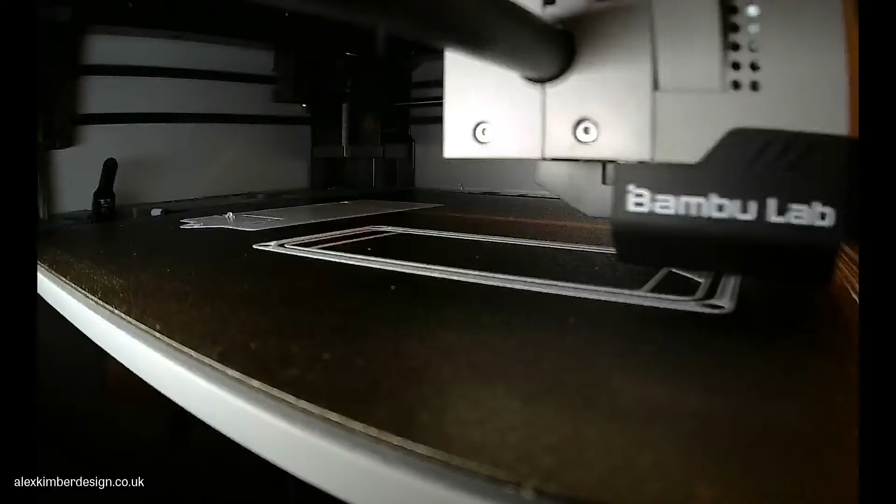So today's stream, there's a couple of exciting things. Firstly, let's take a look at what I'm printing today. So this is the printer working on a...

Oh, it doesn't look good. I don't like that filament peeling up at the back there. I need to take a look at that.

Okay, so this is why we have a camera viewing the print, so I can see when there's errors about to happen, and I can catch it in real time. And that way, we prevent disasters from happening.

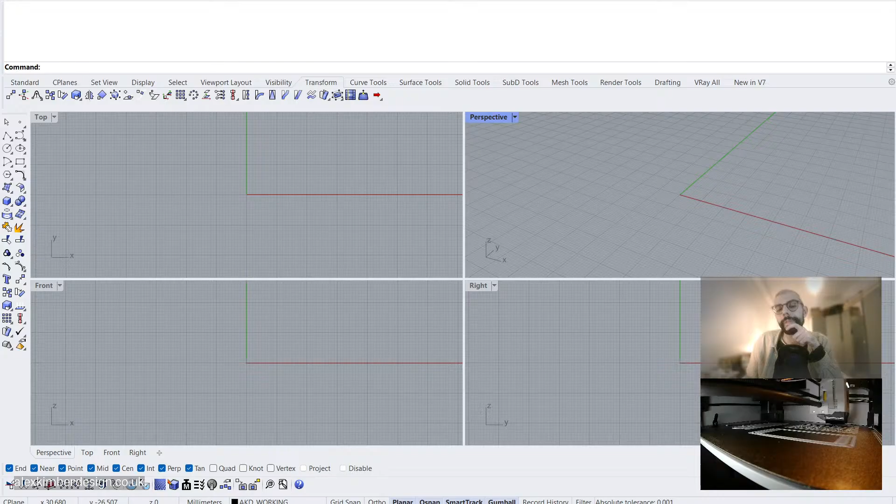So, firstly, I need to upload an image because I took a picture of this galleon chair leg, and I'm going to use that picture as the kind of template to draw from in the program. You'll see where I'm coming from in a moment.

I import a picture, go to my downloads, you'll see this. Now, that picture quality is not great, but it's just enough to see the dimensions. So that's fine.

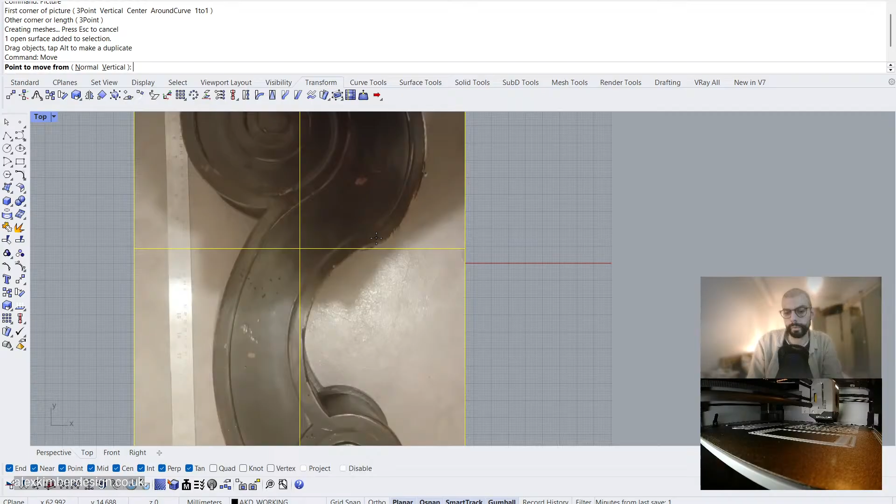Let's move that to the origin. Move... oh. Okay. I'll move it to the center of the world. I can't actually see the origin.

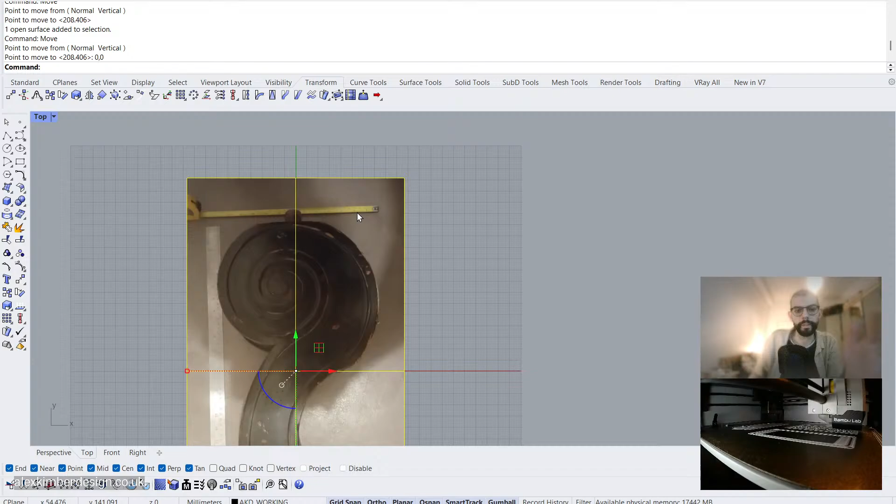Now I've got my tape measure here. I've got a chair leg that I'm measuring up. You're gonna see me doing some quick dimension checks. That's about 61 centimeters.

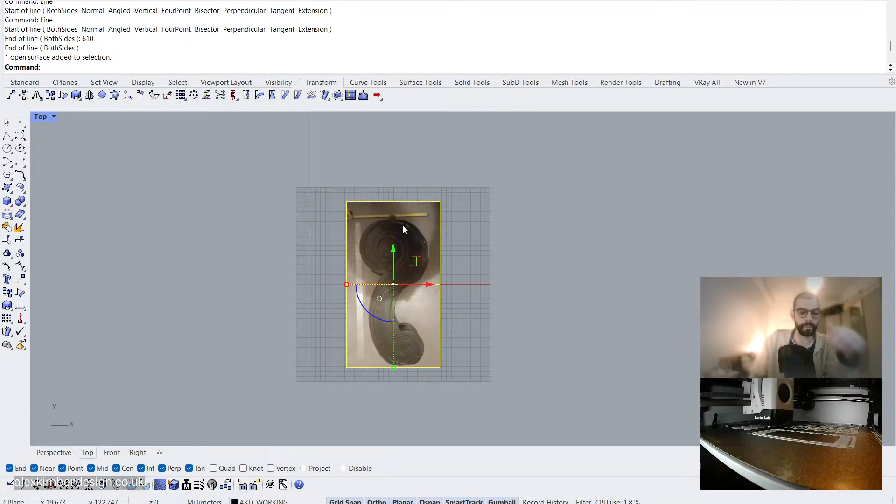610 millimeters. So we need to scale that from a grid snap off there to there, such that it is 610. That's roughly right. Let me make this a bit more accurate.

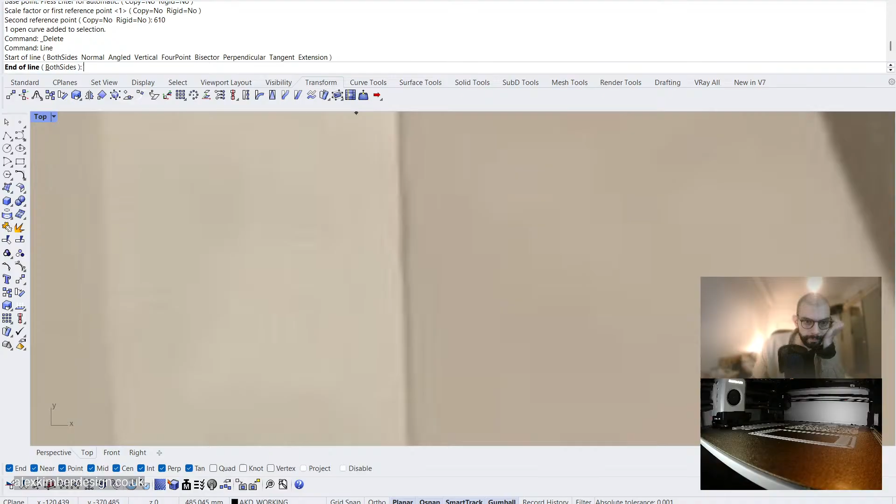From the end of the ruler in the image to... yeah, I got a really blurry image here, didn't I? That says 38, right? 38, 15 inches. That adds up.

Now let's check the distance, end of that line. 328. A little bit too small, the image.

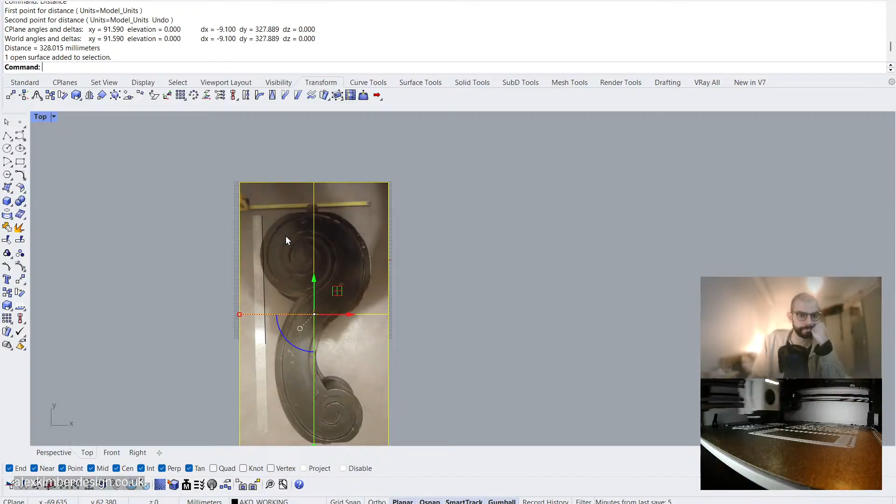Scale from there to there. 380.

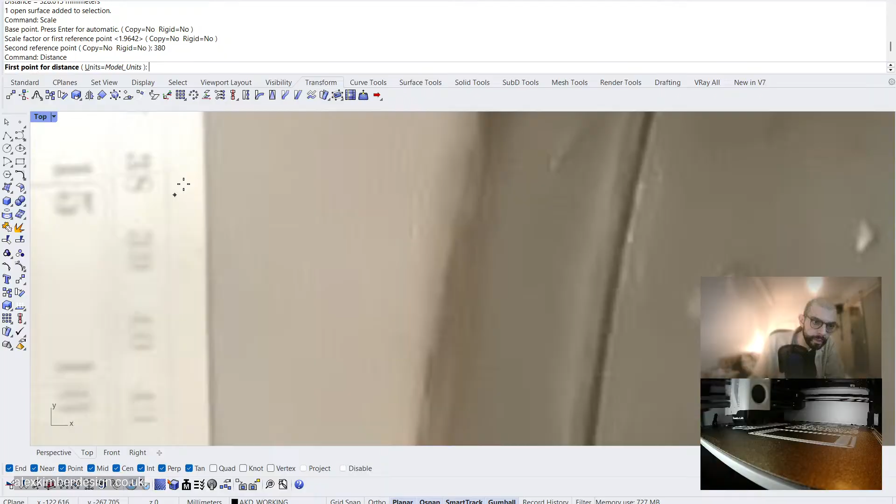Did that do what I wanted to happen? So from the 380 mark, measure the distance from there to the end of the ruler. 379.956. I think that's accurate enough.

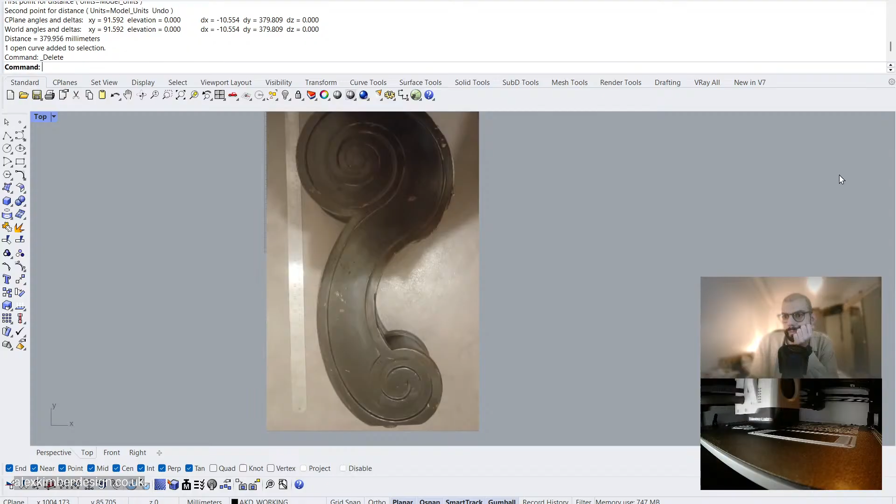So I need to see my layers. Why did my sidebar go?

Where's my... I'm currently missing my tools on the right hand side. There's meant to be a window here that shows me my layers and properties. This is a little bit boring, but I need to see what I'm doing.

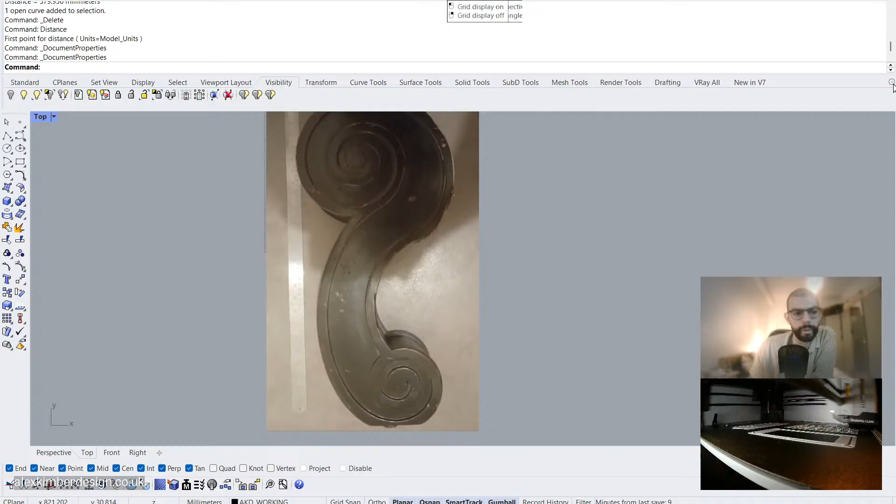Where? Oh no, this is silly. Aha! Ta-da! Right, brilliant, brilliant, brilliant.

So this picture, I'm going to change layer and send it to reference because it's a reference image. I don't want to accidentally move it around like that. So I'm going to lock that layer and now I can't accidentally damage it.

Brilliant. Let's check up on the printer. No errors there, that's looking good. We can get back to working.

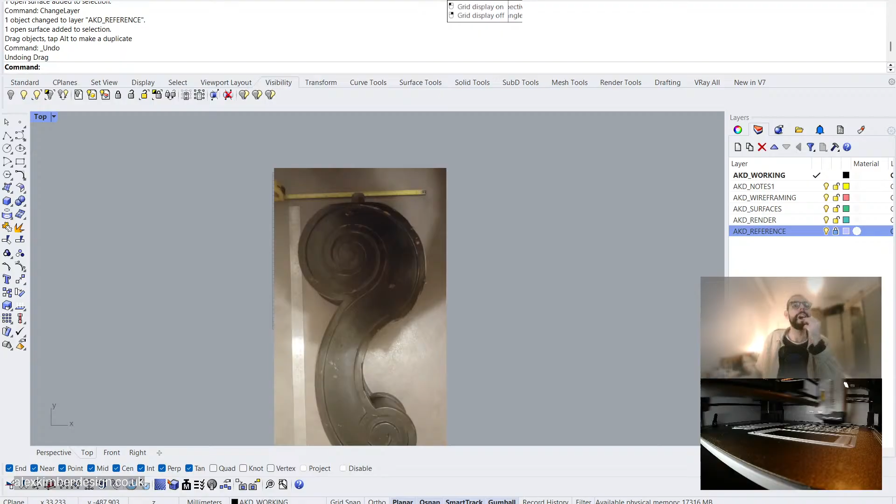Now, this was a terrible image, but it's what we have to work with.

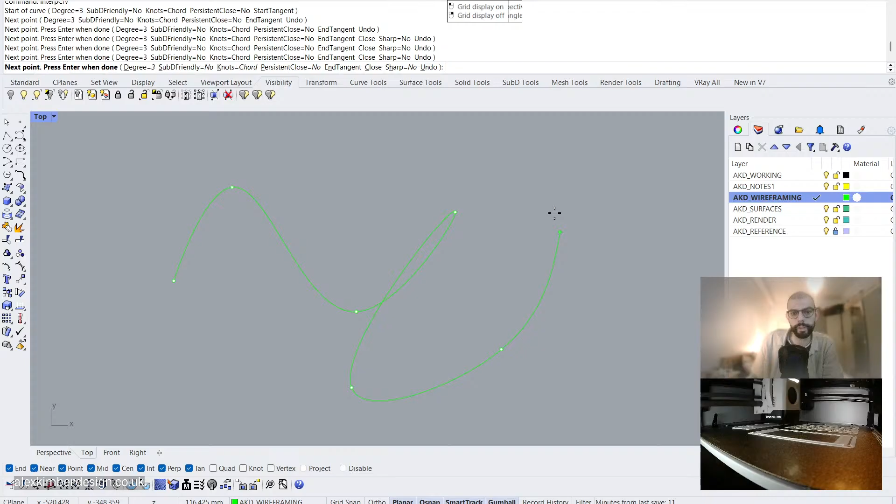I'm going to use, in the wireframing layer that I've got here, an interpolate curve. Interpolate curve means wherever I click - I don't know how easy that is to see, let me change the color, let's make it green - that's a bit clearer. Wherever I click, it puts a point, and the curve has to pass through every single point. I can keep going and so on.

So I'm going to use that tool to trace this out, see how that goes. Start there. This could almost be quite meditative.

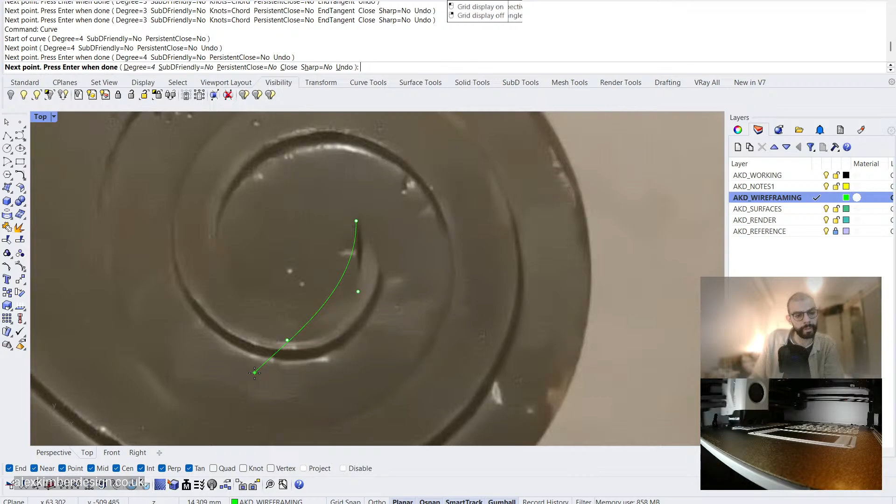Okay, maybe I'm going to do a different approach. No, where's the... yeah, interpolate curves. We can always edit the curve later.

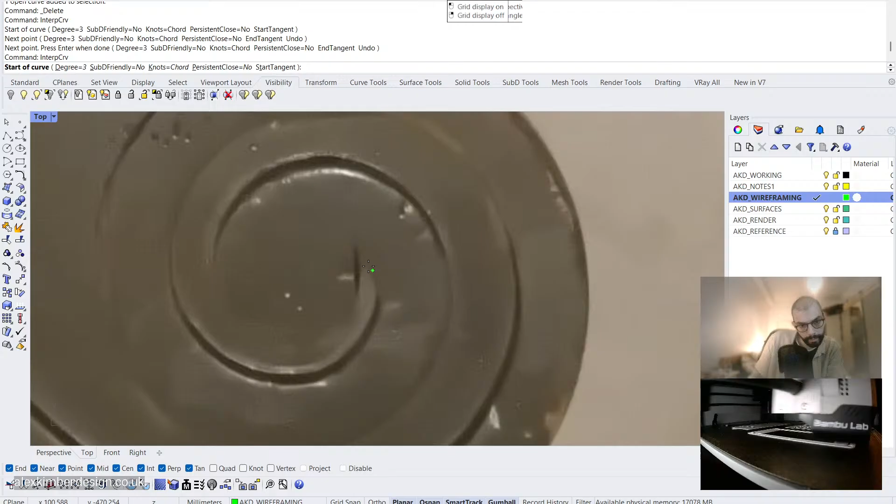I can't see in this photo how tight that bend is. I think it's tighter than I thought it was. There we go, that looks like it's a bit better.

So I want to try and aim for the top edge here and cut down into it. I can see how I could go for either this bottom edge or this top edge, because it has depth. I'm going to use the reflection, where there's a kind of radiused edge, as a guide to see where that top is.

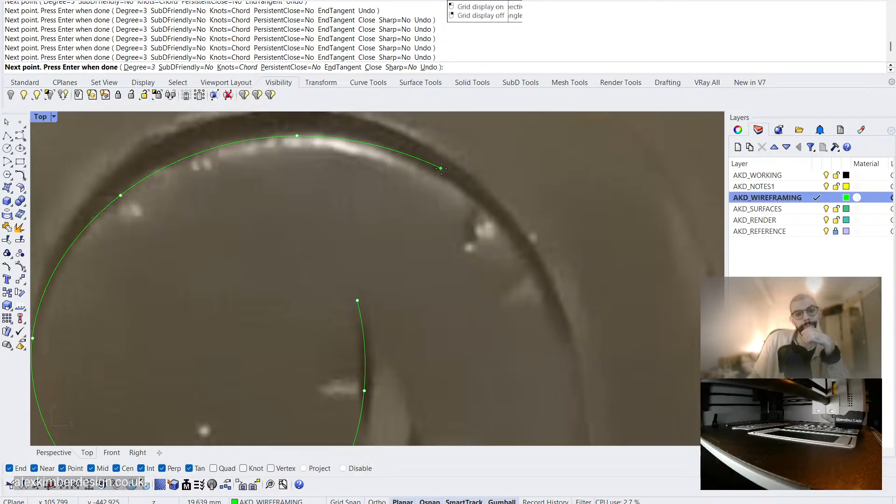And we're going to go round and round and round. Now this bit is pretty boring, so this might be an opportunity for me to talk about why it is I'm doing what I'm doing.

Right, I'm going to terminate that curve there and do a new one starting from there. So I'm thinking with this project, I don't know whether it's going to be a chair or a side table or a lamp. Feel free to leave comments and make requests for what you'd like to see.

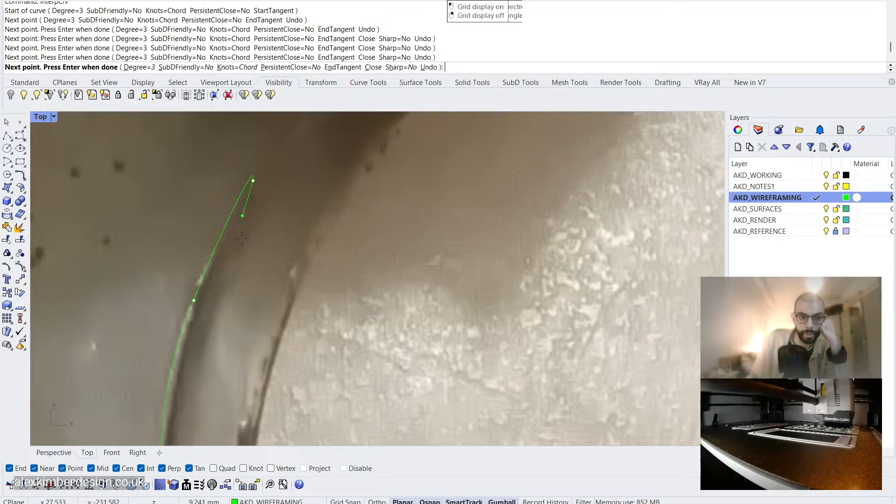But my gut feeling is that it's going to be a little stool. Very robust bit of wood. Don't see why it couldn't be a stool.

Just taking a look at the model to see what point I'm at. Round, yes, that's a hard corner. So we're gonna finish that there and do a new curve.

So let's say it's a stool. I'm thinking what would be interesting is to 3D print a seat, or 3D print the seat to attach on top.

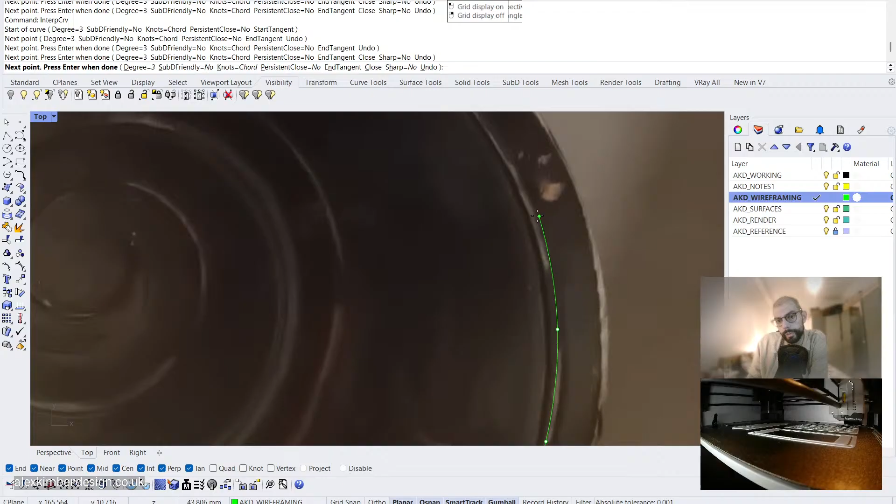And instead of doing it in a style that's in keeping with the very old-fashioned looking table leg, I think I might do some crazy sculptural, mad looking thing, just to contrast the old and the new.

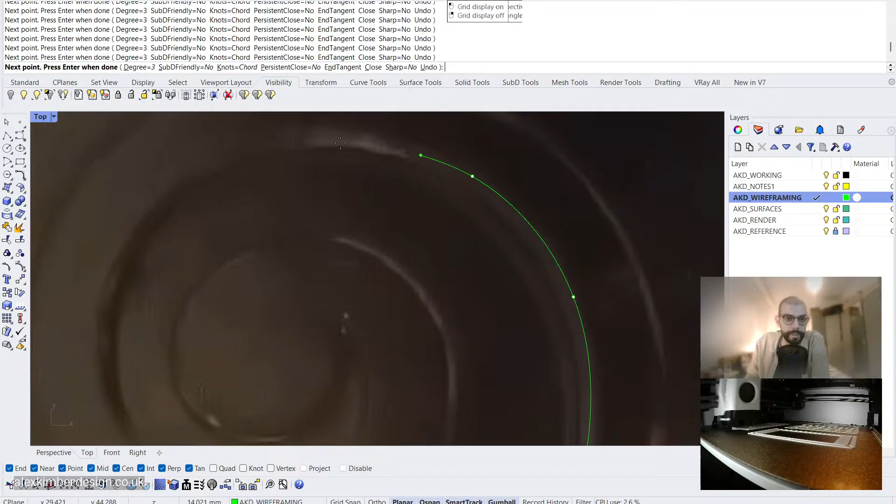Combining to make something not quite as good as either. I'll tell you what, this is quite relaxing, just clicking around in spirals.

Now I can already see this curve is a bit wonky, so I might need to adjust it later if I want to get a really accurate one. But actually, I don't need a really accurate model here.

I just need to get it in CAD so that when I design the features that are going to interact with it, like the seat or the foot or whatever, I can actually work with it on the computer. So all the decorative elements on this don't need to be perfect. Important to remind myself: done is better than perfect.

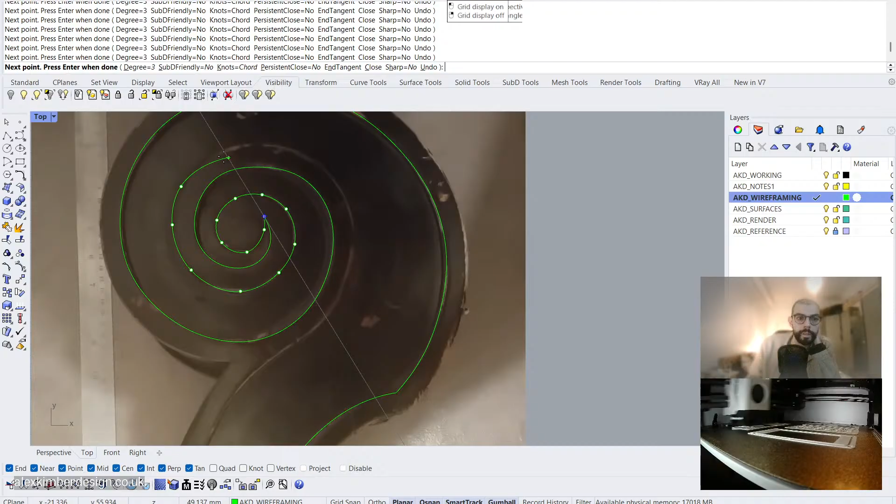No. What was it? Take off object snap. That's what OSNAP stands for, object snap.

Now this has got quite an annoying issue. Can you see how the curve is coming in kind of at one angle of attack and then flexes out in the other? That's going to cause me problems. So what I'm going to do is just use a lot more control points here, which might give me a sort of raggedy, vibrating edge. I can fix that later by trimming it back and blending it, but for now that's going to get me around this curve that changes direction problem.

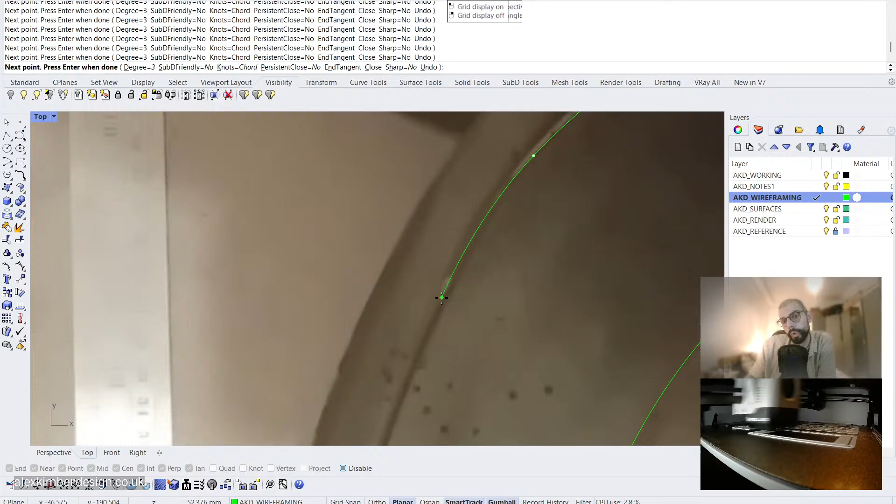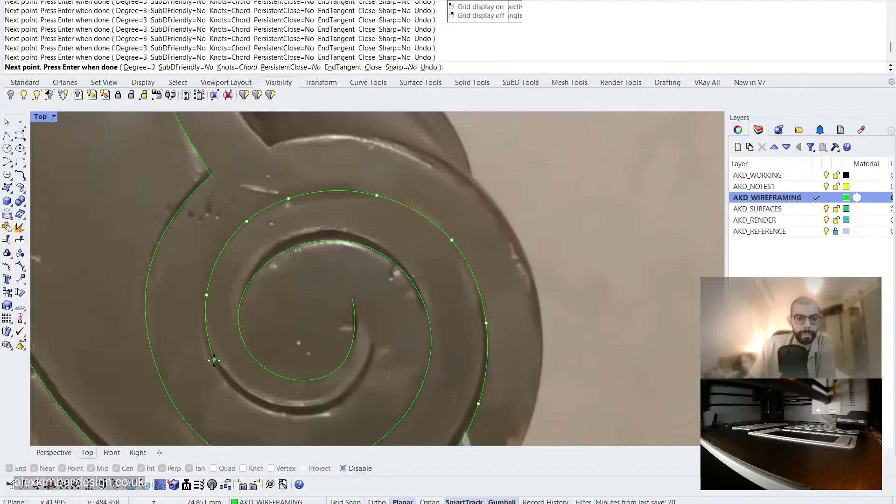Yeah, when I saw this being thrown out the other day, I thought, oh, I'll have to take that. I felt very justified when I came home because I was carrying this on the train, taking up a lot of space, and as I was walking home from the station, someone said, 'What are you carrying?' We got into a conversation and they said, 'Oh, that looks amazing. It could be a lamp or even just a work of art on its own.' So a stranger complimented me on my piece of trash.

Okay, I'm going to turn object snap back on to locate that little corner. Ding, lovely. So we've now captured the inside area, as it were, I think so. Now let's do the outside.

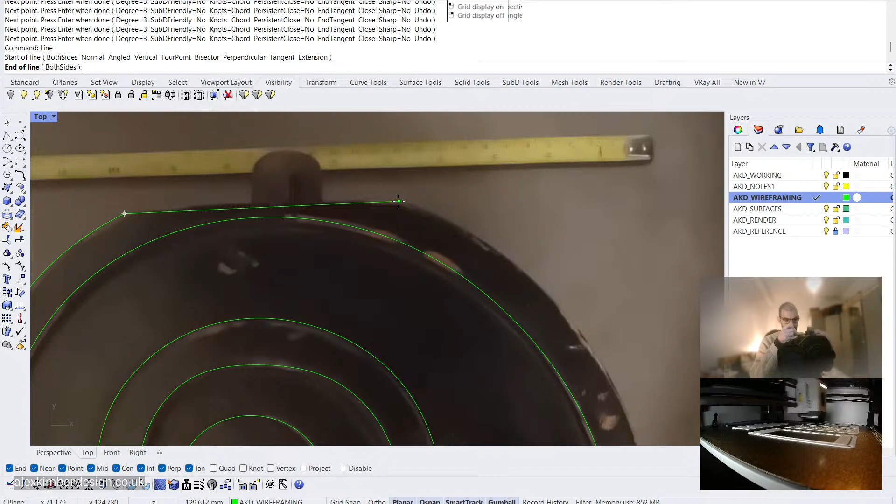That's obviously going to be a straight line. Now I think this part at the top does need to be quite accurate. Let's measure exactly how long that flat surface is. Oh god, this thing's heavy. At 98... 98. Oh, that looks shorter than how the picture presents it.

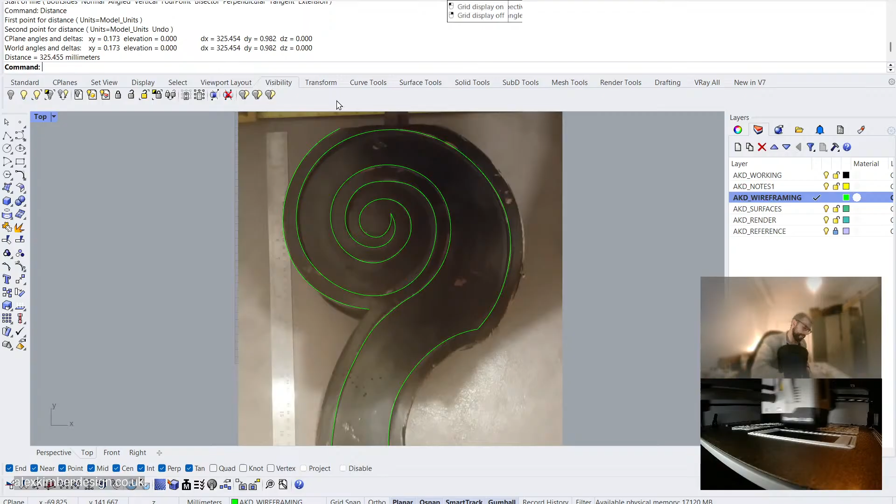Bit of an issue. Okay, let's do distance from that far edge to that edge, just kind of measure what the breadth is. So according to this, it's 325 millimeters breadth. Only 32.5 centimeters. My scale is off, I thought I'd scaled that.

Must be something to do with the perspective in the photo or something, but the scale's a bit off. So we're going to unlock that, select everything, and let's do this another way. If I measure what it is in the real world... getting a width of 226 millimeters and a height of 531 millimeters. Write that down.

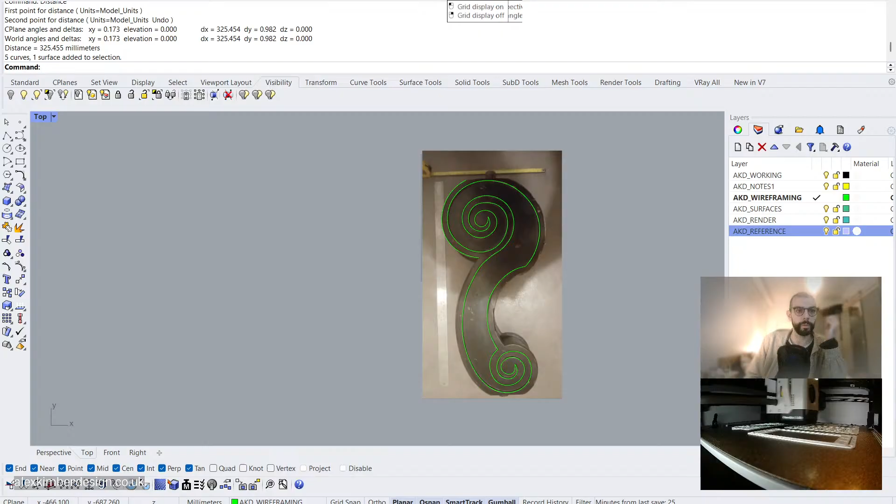Now, for those of you who are my diligent and consistent fans, you might be asking where the funnel from last week has gone. What happened to the funnel I was modeling last week? I didn't get around to finishing it, is what happened to it. Then between then and now, I found a table leg and decided to start modeling that instead. But I will finish up that funnel because it would be really useful for preventing water damage in Grandad's conservatory. I just found an exciting looking table leg first, so I thought I'd make a start on this and then finish the funnel.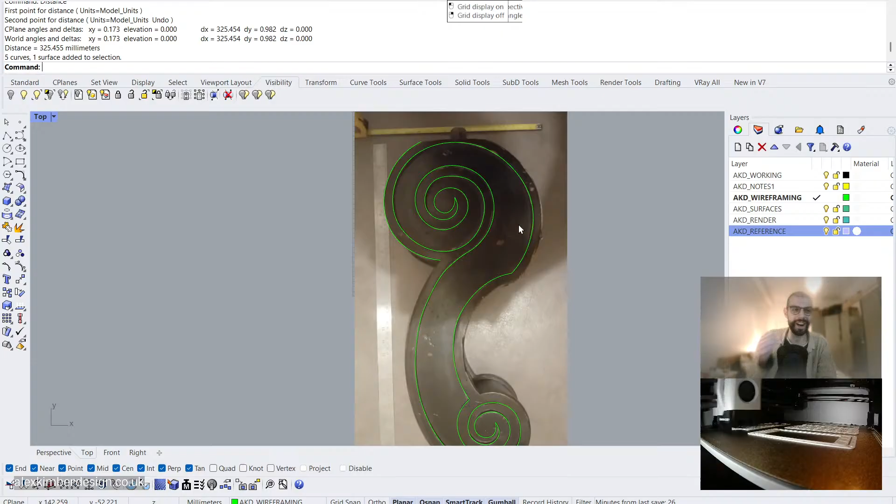So what I'm going to do is progress this a little bit by making a rectangle 260 by 531. That's the size it should be. So we're a bit off.

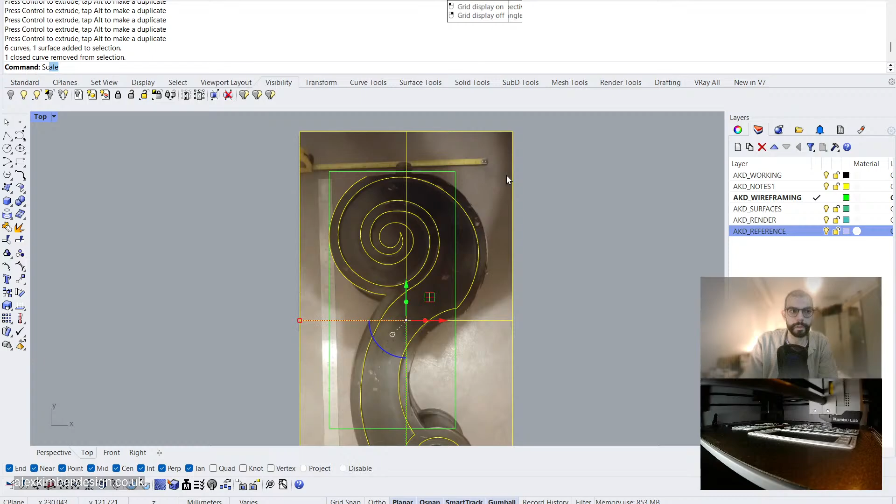Now let's select everything apart from that box, scaled from there to about there, and bring it back to...

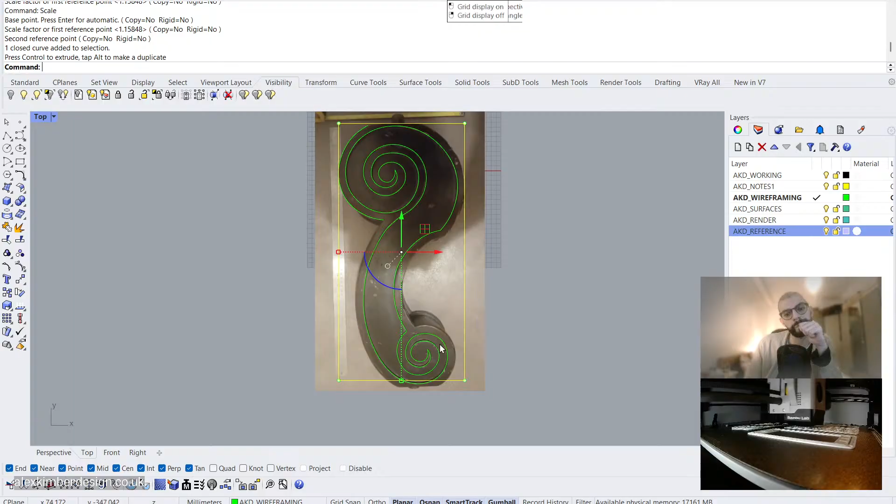If I still have my Photoshop subscription, I might be able to flatten this image in a way that makes a bit more sense.

You're wondering what I'm eating on this stream? I've got some dark chocolate and I've got some chamomile tea.

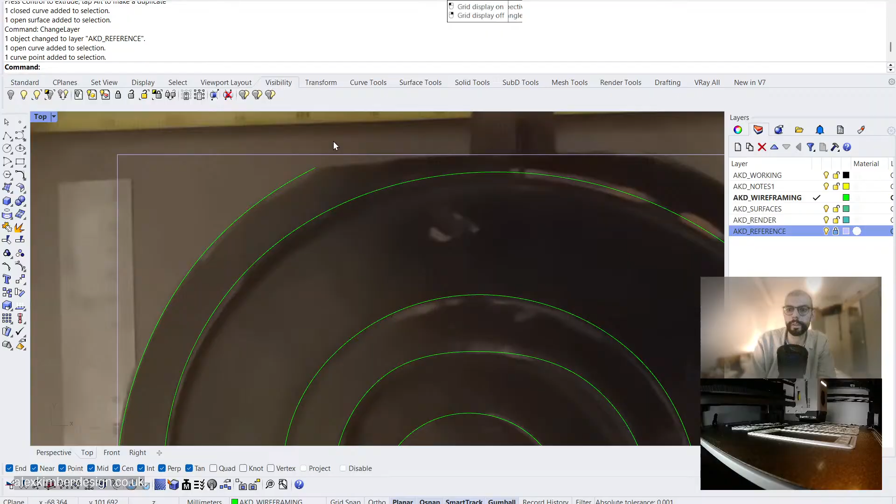Okay, I'm going to select that and that, send it to the reference layer. I'm going to close that, lock that. I'm going to finish this and then scale it later.

So what did I measure that as? 98. All right, that looks more like it. Back to the interpolate curve.

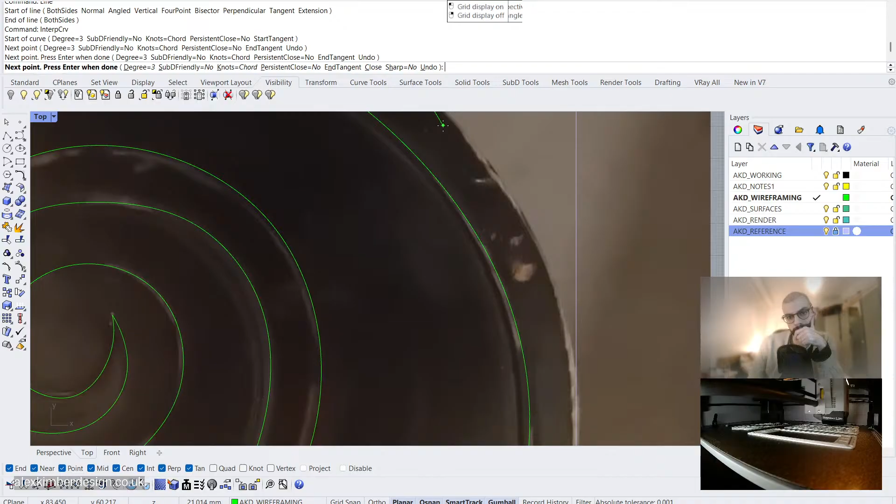Now, once this is modeled up in here, this might even become part of a sort of mini series as we develop this bespoke product.

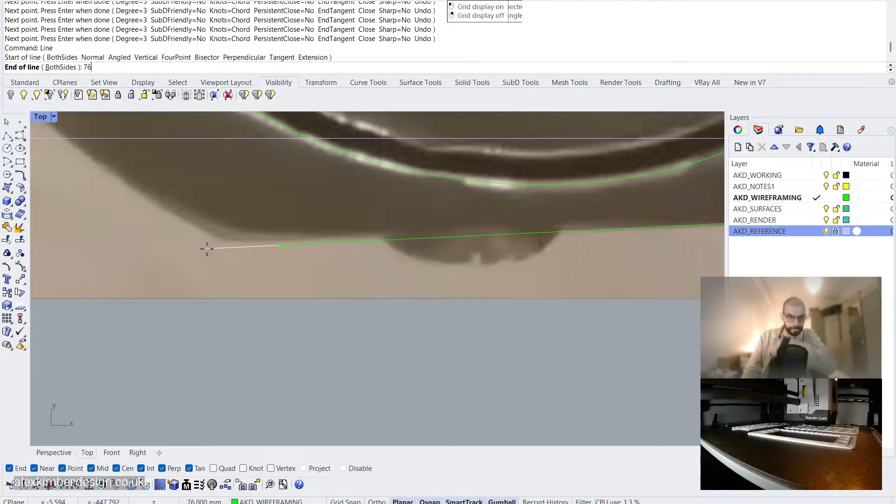Now let's see what the distance on that bottom flat is. I make it 76. So we do a straight line starting from that point in that direction, 76. Okay, a little bit shorter than expected, but it's fine for now. Interpolate curve, up from there.

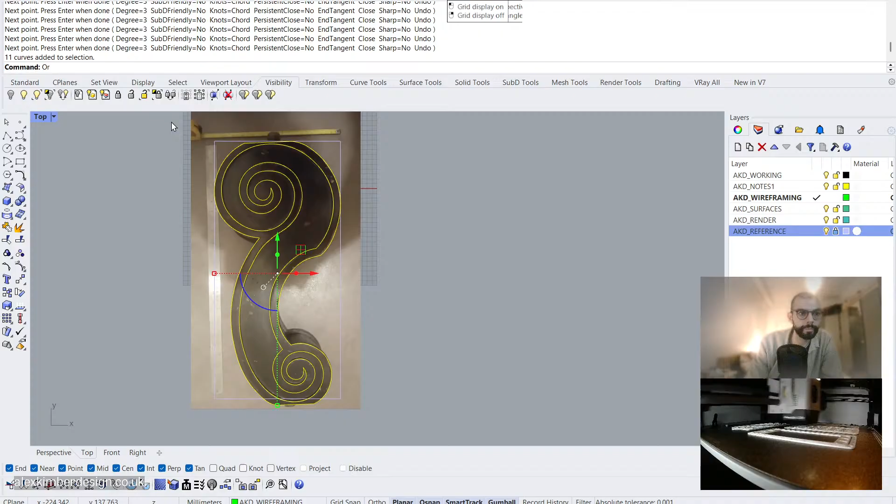Excellent, so we've now got a bit of a profile. Let's rotate that. I want it level. Orient line from there is level.

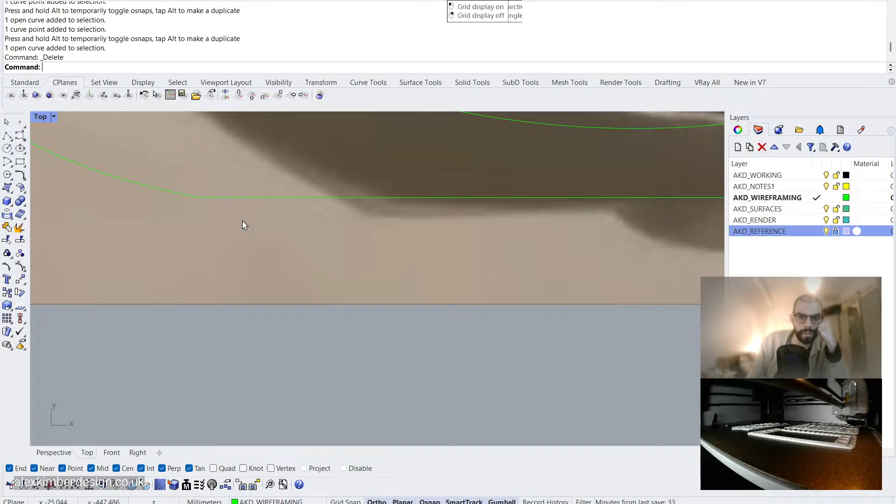Oh, look how close that was. I'm going to move this control point down, that control point, delete it. Delete that guideline. Now we have two flats that are level. Let's just check how long that is. 76, that's perfect.

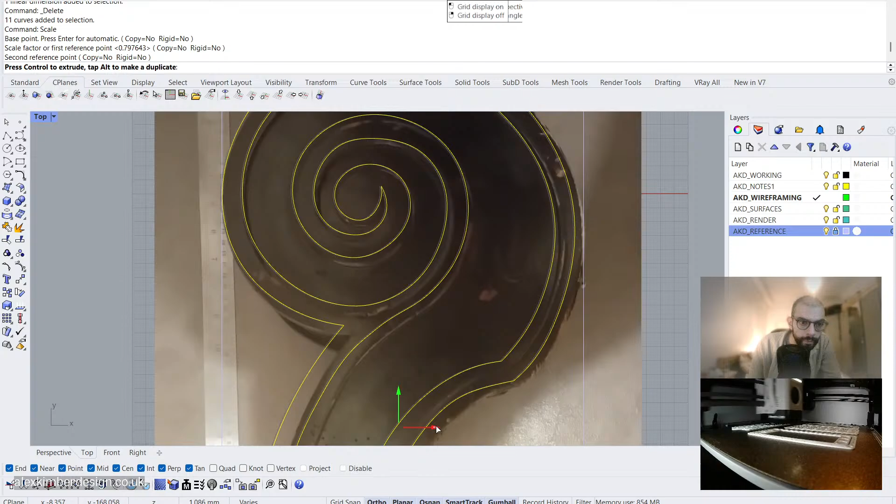Now let's take that whole thing and scale it so that it fits within our box. I think for developing this as a stool, it's more important that I have the height accurate than the width at this kind of decorative level. So that's fine. What I'm going to do now is start joining these curves together. Join. We can actually hide that reference layer.

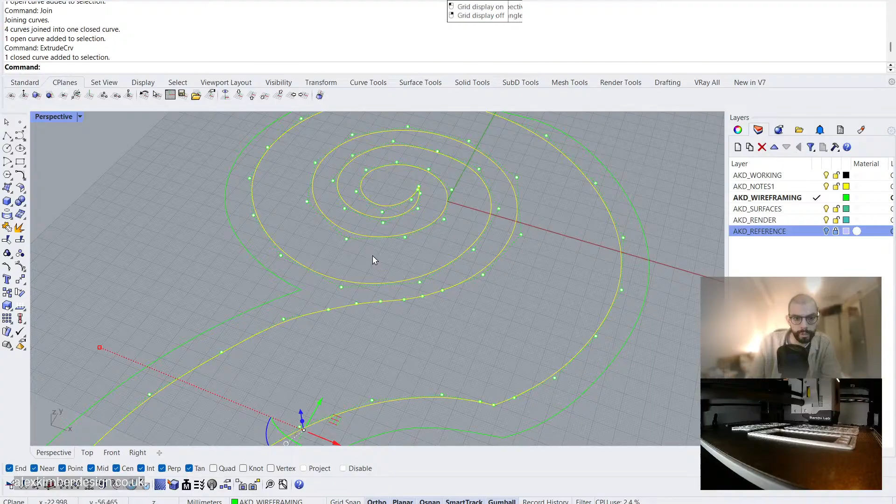I wonder if I just select both of those and extrude. Self-intersecting. Where are these?

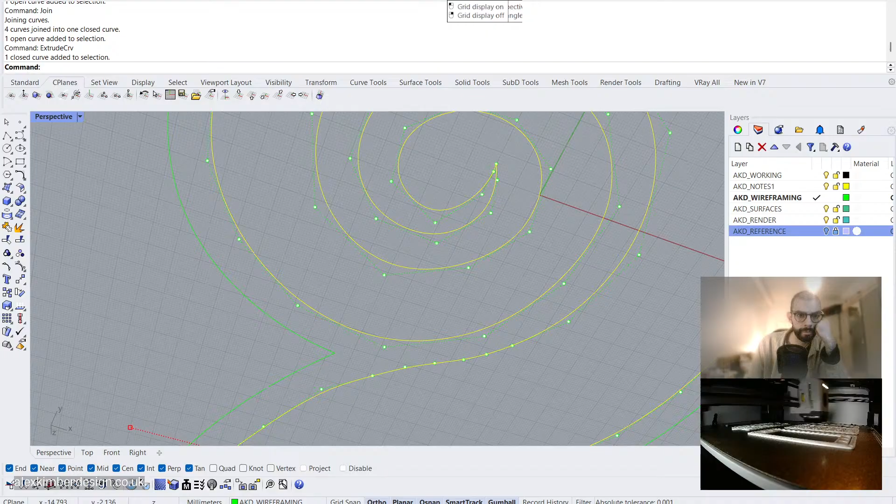Where do I have the self-intersecting curve? Find self-intersecting curve, Rhino. Oh, look at that - just had to do a quick Google to see if there was a relevant command. So that is a self-intersecting curve.

There's going to be a corner somewhere that it doesn't like. There we go. Trim that. Oh.

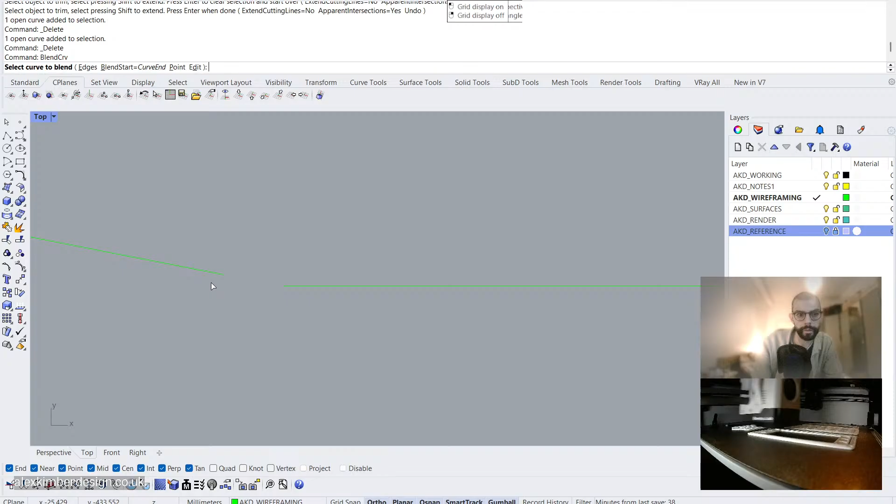Okay, here's what we're going to do. A line from there to there. Trim those. And then blend curve from there to there. Just a tangency curve. Join. Okie.

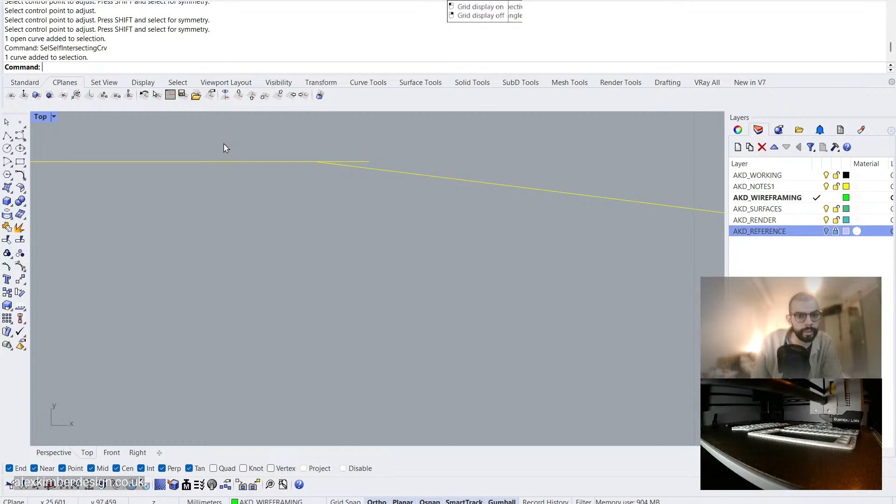Select self-intersecting curve. Still selecting this. Where else? Maybe that's our problem. Trim, edge. There we go, that must have done it. Select. Self-intersecting curve - nothing. Great, solved that problem.

So the computer's smart enough to pick up when there's geometric errors like that, but it's not quite smart enough to show them to you.

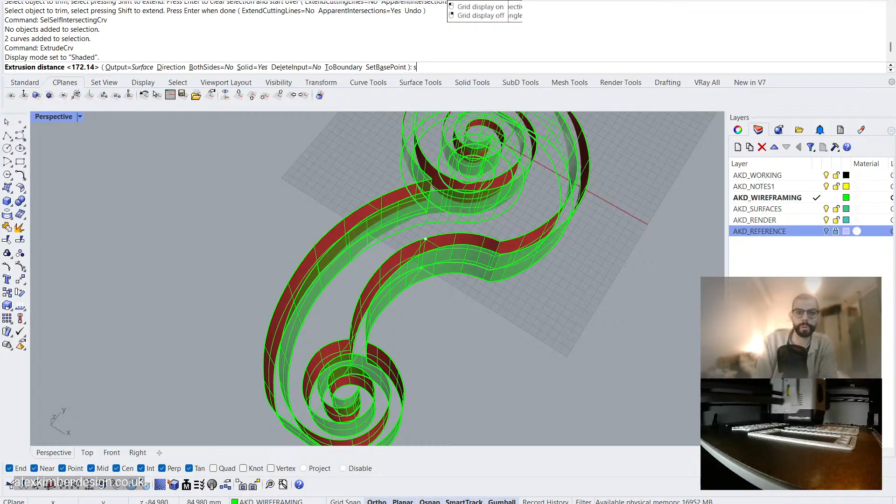Extrude curve. Brilliant. Now, if I put solid, is it going to cap it intelligently? No, not going to understand.

So the space that's being extruded - if we look at this model - is this kind of rim, but the rim pokes out, it's proud of the bulk material by about 4 mil. By about 4 mil.

Let's use 4.5... 4... 4.5. Let's say that's poking out by 4.5.

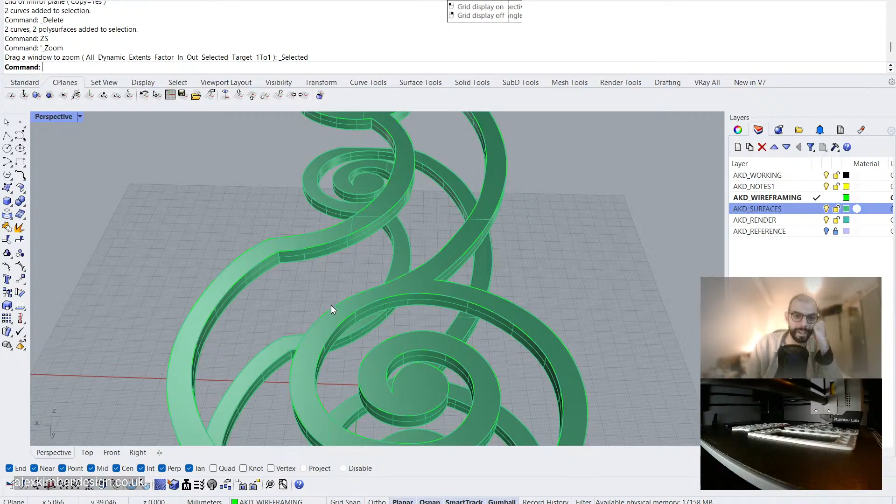So we're now back into this. Sorry if you missed all the fun, but this is where we're at now. We've got the two kind of outer rims, and I'm going to model the solid block in the middle now.

So let's look at this curve again, and let's lock off our surface layer so I don't get that mixed up. The solid block is about 5 mil, maybe 6 mil offset.

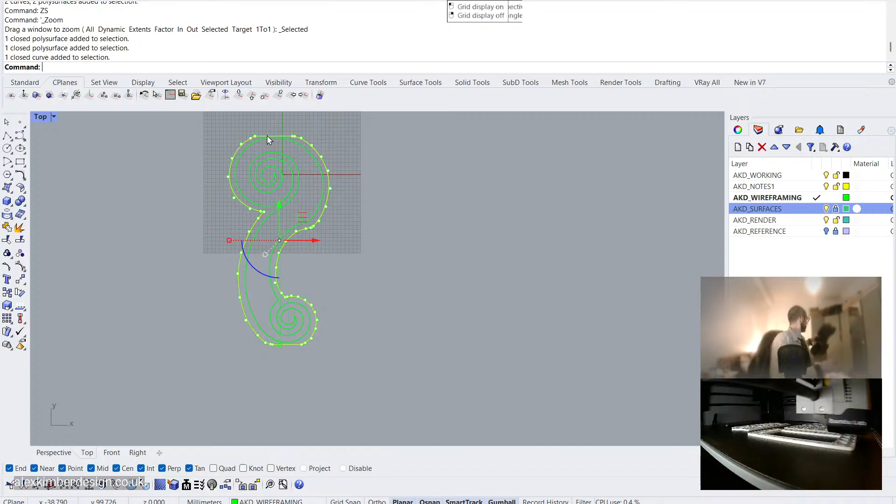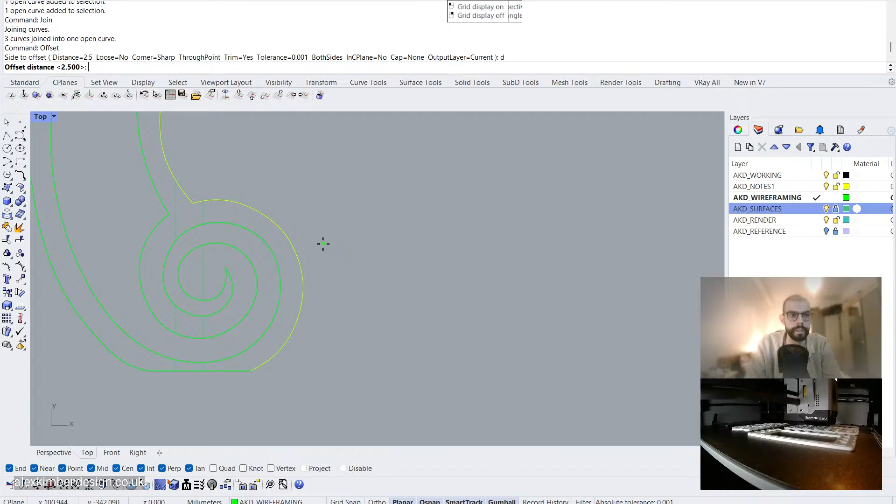I'm going to explode this curve, meaning separate it into its component parts. Join those together, so I have a kind of left and right side. Then I'm going to do an offset, changing the distance to 6 millimeters, and bring it offset inwards.

Does that work? Might need to do some adjustment. Same again, let's offset that inwards. Now with this, I'm going to need to extend the curve. Now extend it past the base because we've got a flat there. Do the same thing here.

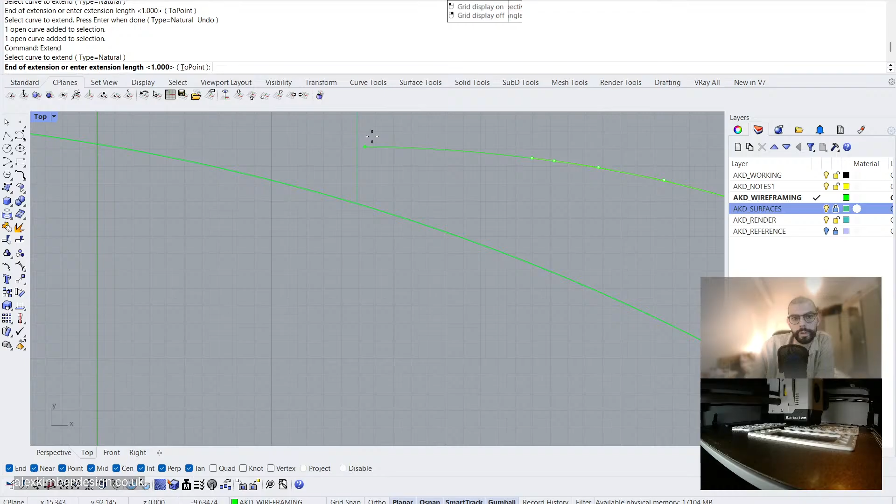Curve to extend this one. Now we've got problems there, that's not going to hit the base. So I'm going to trim that back to sort of there. This is being a bit rough and ready, but I think we'll survive. Extend that curve. Yeah, we're still not getting there, are we?

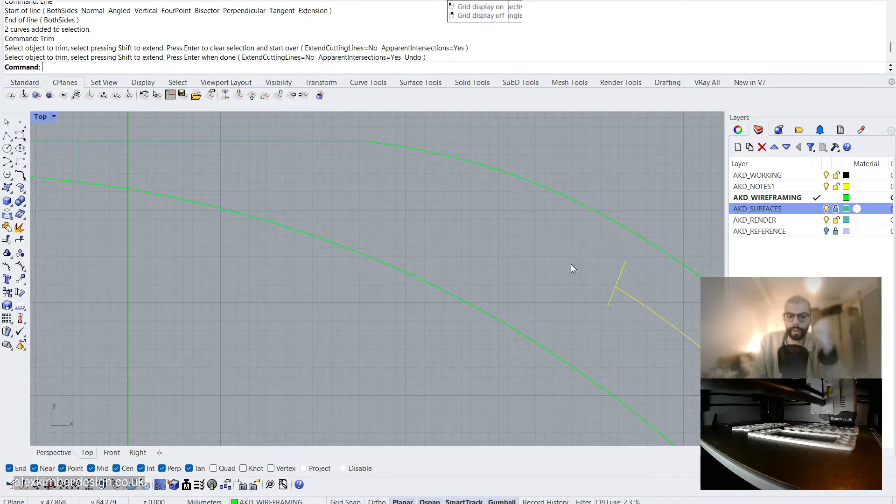Trim to there. Extend that curve. We're still not getting to the bottom. All right, let's do this a different way.

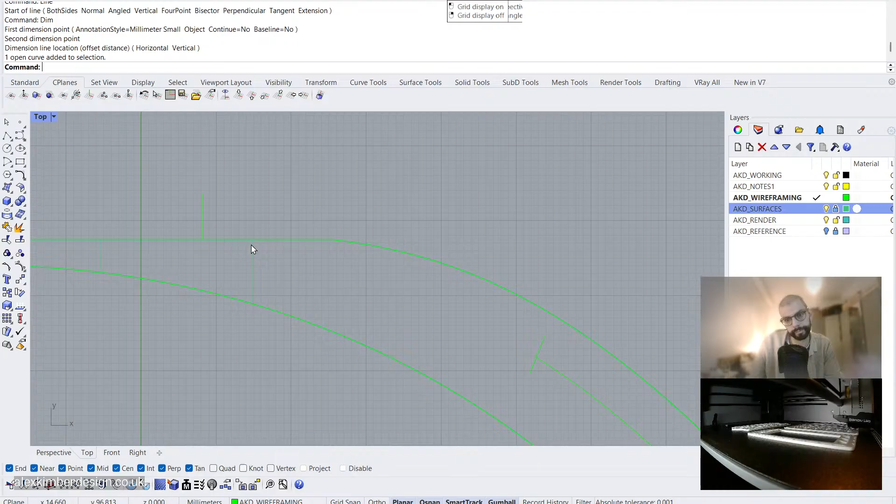Distance from there to there, 17.5. So from here we're going to move that minus 17.5. Now let's do a kind of straight line to there, then that further back. Delete that guideline.

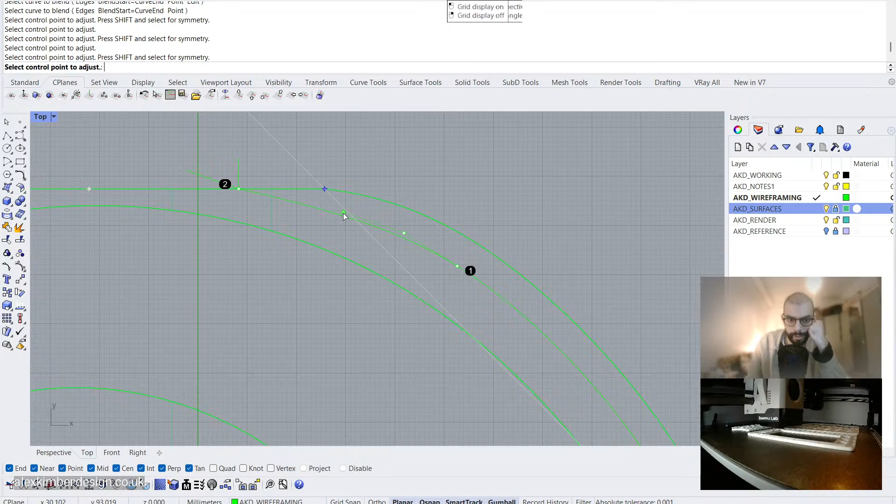Delete that, and then I'm going to do a blend curve from this to there. I'm going to do curvature, maybe that's more like it. That looks right. Brilliant.

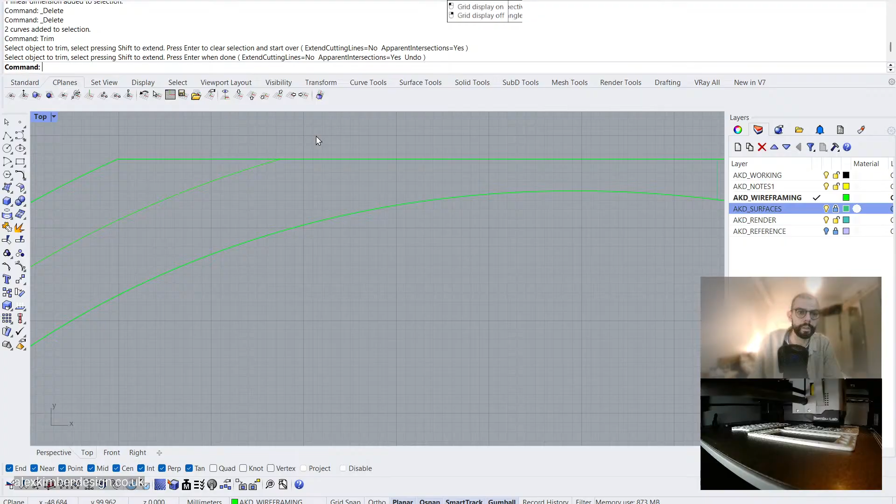Explode, that should release that. Then I can join that. Here I can get rid of that dimension. Trim that line back. Great. Now let's do the same down here.

Extend, are we going to cooperate? Ooh, yes, that's good. This is clearly not going to cooperate, you can see it's going to bend around. Yeah, that's never going to reach the bottom. So we do the same thing again, we've got a method now. Let's cut that back.

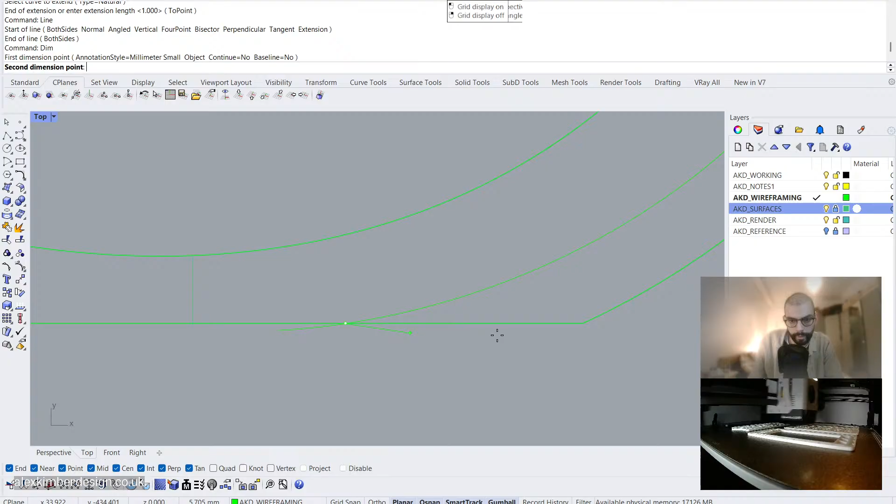Let's measure how far this is. That's 20.7. Let's do a line, move that 20.7. Let's do a bit of a straight line from there to there, and get our angle of attack right. Trim that back, delete that line. Blend curve from there to there.

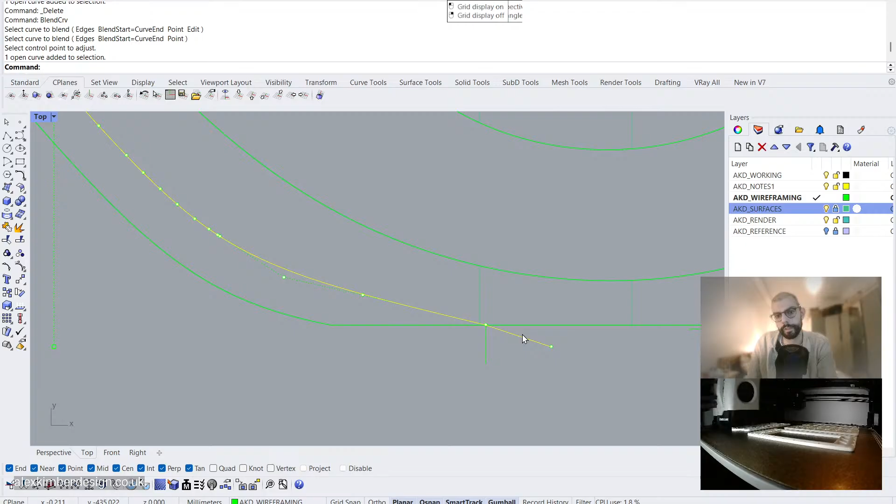Excellent. No, that looks fine, let's just trust the computer. Perfect. Explode, so we've got our 2 lines back. Delete the first line. Join that curve with that curve.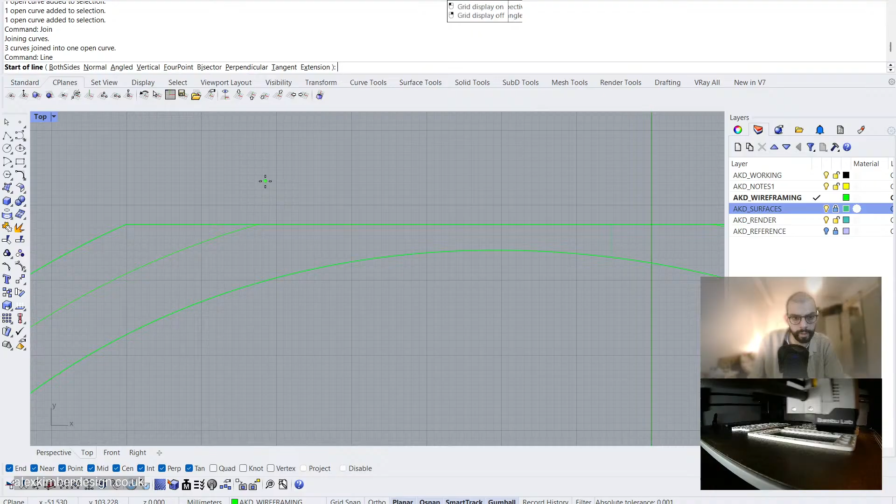Now, you won't be able to see it, but I'm putting a new line in here to join those 2 together. Join, and we're going to do the same at the top here. So I'm going to do a line from that point to that point. Join.

Let's join all these curves together, and I'll have one closed curve. See, it says there, closed curve. Cool.

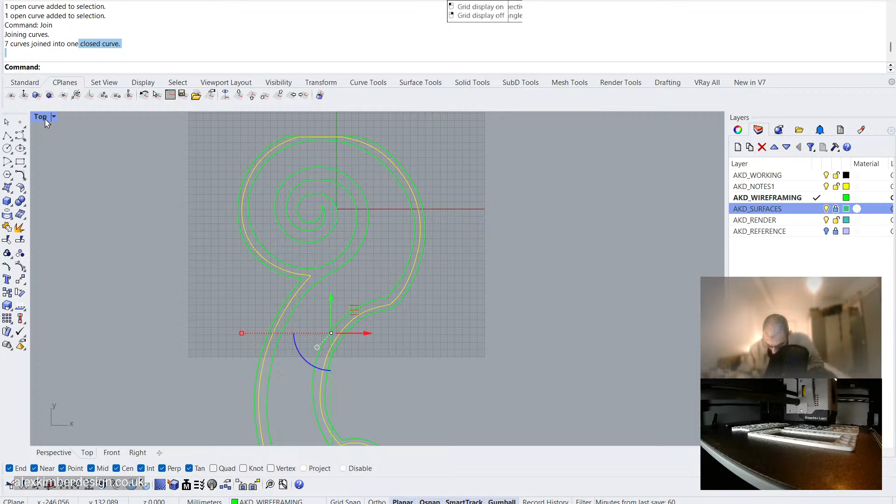Now, this, as I said earlier, is recessed about 4.5 millimeters. Let's go to the 3D view. Let's move that curve down by 4.5.

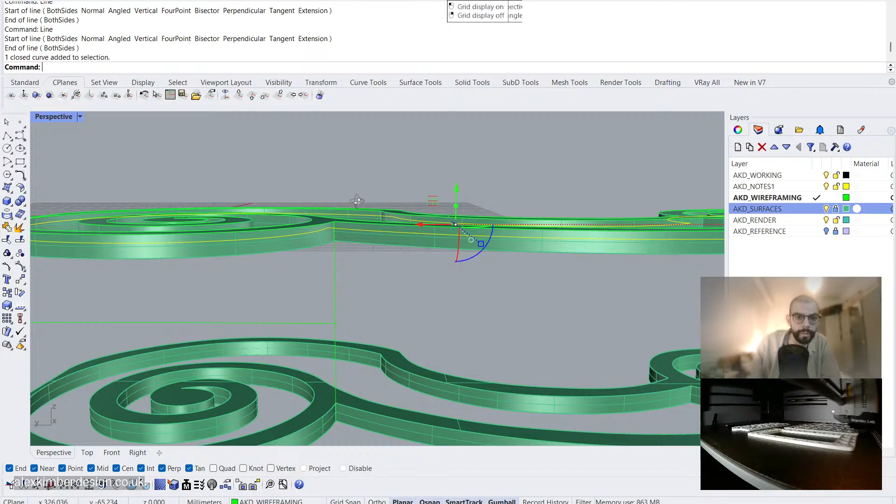Now let's remake that mirror line that we had before. Midpoint, create a mirror line, make sure I'm selecting the right curve. Yes, go back to the right hand view. Mirror along that line, delete my guidelines.

So now, let's hide those surfaces. I have a curve here, which is 4.5 mil set in from that outer edge of the rim, and this curve here should also be 4.5 mil set in from that outer edge.

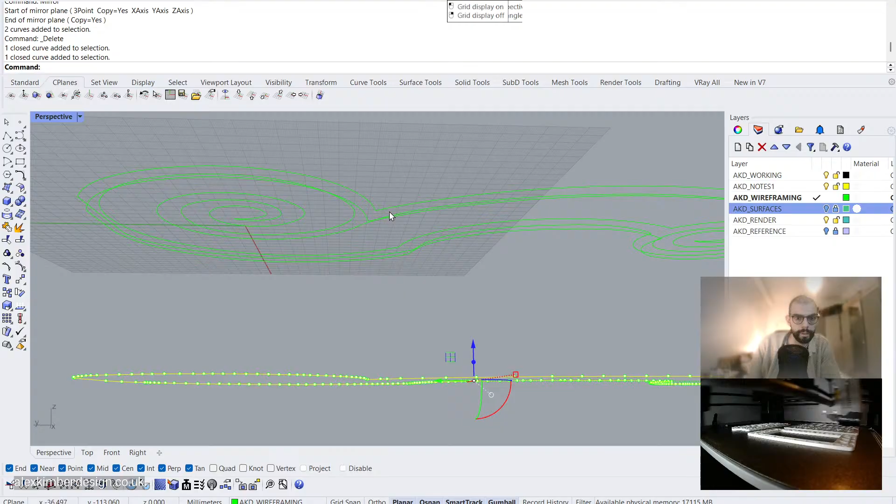So what we do is, this is the exciting part, hide the surfaces again, take those 2 and loft them together. Okie dokie. And then take that solid and cap it. Lovely, so we now have a solid block. Show those original surfaces. Oh my god, it's like I've actually modeled the thing in real life. Brilliant.

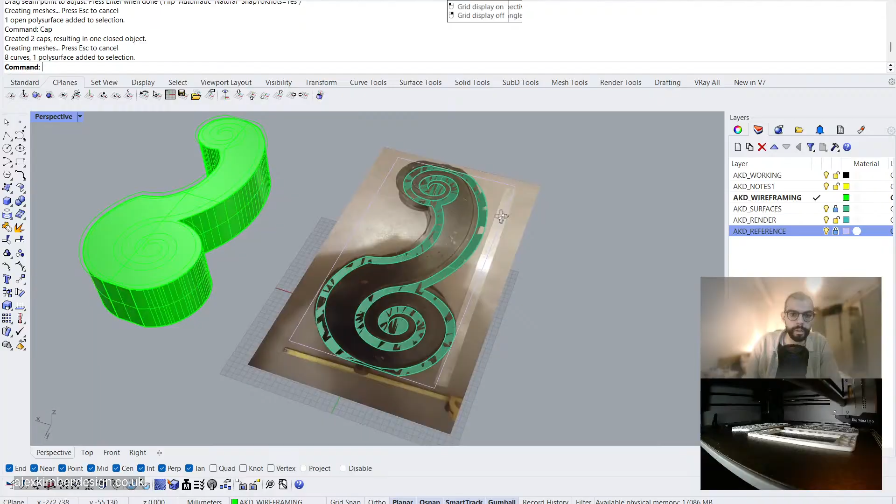Let's open up our reference image, just for a moment, move all that to one side. See what's going on? I think I've actually done it.

One last thing to do. Firstly, I'm going to move that to the surfaces layer. I'm going to unlock the surfaces and jump into that layer. There's the tick indicating that layer is active. Hide the wireframing. Select my surfaces, 3 poly surfaces, and do a Boolean union. Don't ask me to explain what Boolean.

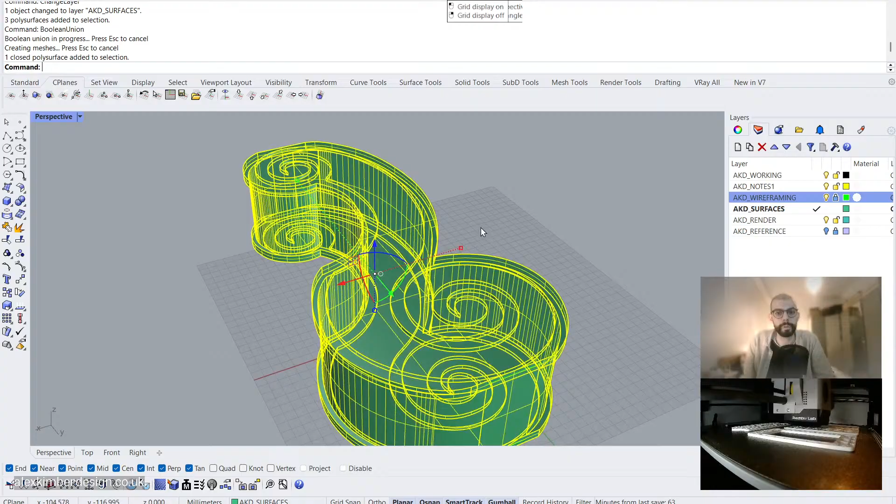One closed polysurface, excellent. So that should be my table leg that I picked up from the dump, accurately modeled into Rhino so that I can make a bespoke design project with it next week, and perhaps make a bit of a mini series out of a one-off design.

Let's check back in with the printer before we say goodbye for the evening. That's looking good. Lovely.